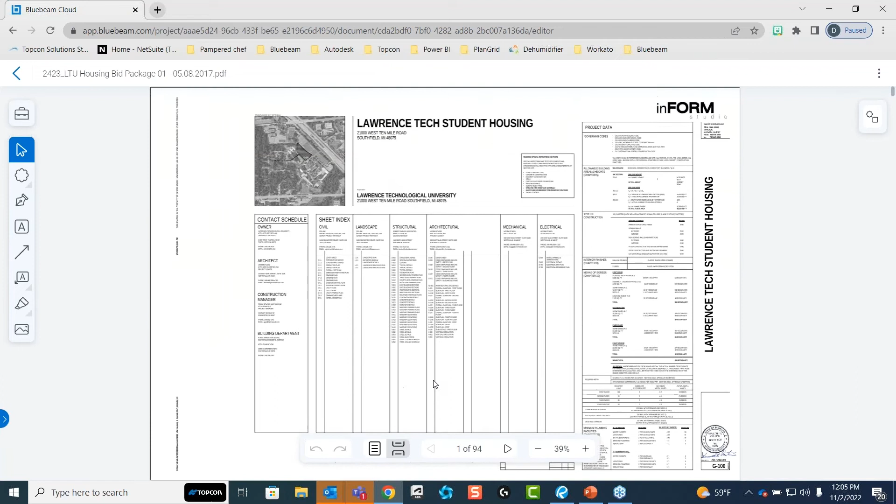One of the big things I wanted to talk about today: we talked about documents and drawings and different ways we can start getting things up here. But a big thing I wanted to make sure I mentioned, documents here in Bluebeam Cloud is for storing any of your documents, and that's going to be different from what we're seeing in drawings. So if I go into my LTU documents here and click on one of my PDFs, you'll notice it actually gives me the capability to do that one full page or scrolling pages view of these PDFs, so I get to look through all the different pages within this PDF document.

If we go to drawings, you'll notice that essentially what drawings does is it pulls these PDF sets apart into individual drawings and places them here. Now it is going to run OCR over those drawings, trying to find the actual information in terms of what is in the drawing itself, like our sheet name, sheet number, things like that. So one thing to think about is whether the document is capable of giving us that information, like the C107 here striping plan, or the A1.1.1.

This one is a little big, but it's saying sheet title and number, first floor plan. Is that document going to be able to give us that?

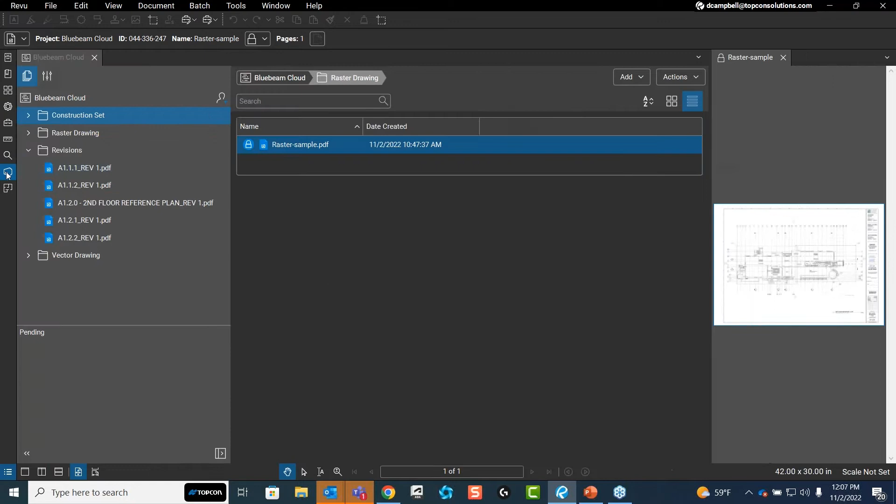One thing I want to mention before we even push it up to drawings is that I like to go into Revu and actually run the OCR on the document. So if I go into my raster drawing here, I have a raster sample, and I'm going to show you guys how this works today. I plan on doing a little bit of everything to talk about getting these documents ready and getting them up to the cloud.

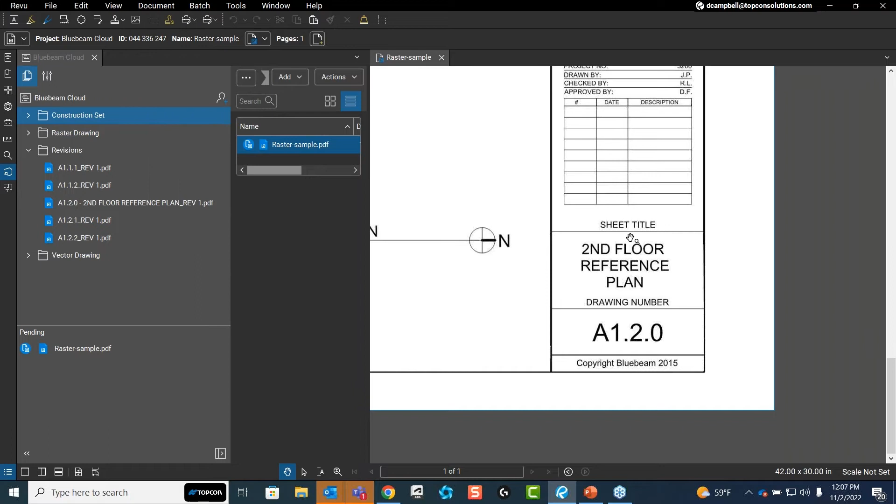So on something like this, where you're going to see it's a scanned document, that's exactly what this is, I typically try to go to OCR. Now since it's in my project, I'm going to need to check that out, and then I can go ahead and run OCR on it to try to pull some of the graphics or information from the content of this PDF.

We're going to dive deeper into that workflow in a second, but I want to back up because the other piece I need to talk about when looking at drawings is the revisions. In this case with my door schedule, you'll notice that it did say R1 on it.

Some of the other ones I wanted to mention here, I'm going to go ahead and show this to you guys so you can see exactly how this works. But one big thing that I've noticed within Cloud is...

Cloud does not give you the capability to compare your drawings from one revision to the next, and it also doesn't really stack them. It pretty much replaces the drawing with the revised sheet, which is a good thing for going out to the field—we don't want them to accidentally open an older drawing, so that is fine.

But at the same time, for managing that documentation, for managing that set, it's not going to tell us the version in that sense. It can tell us in the sheet name if you have numbered it that way, or it might have the R1 there for us, but it's not really going to give us the capability to roll back or see the changes between the two different versions.

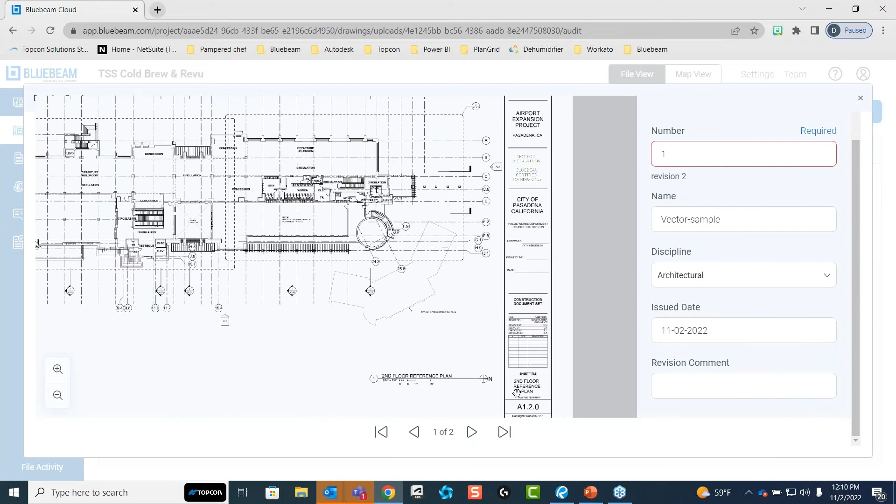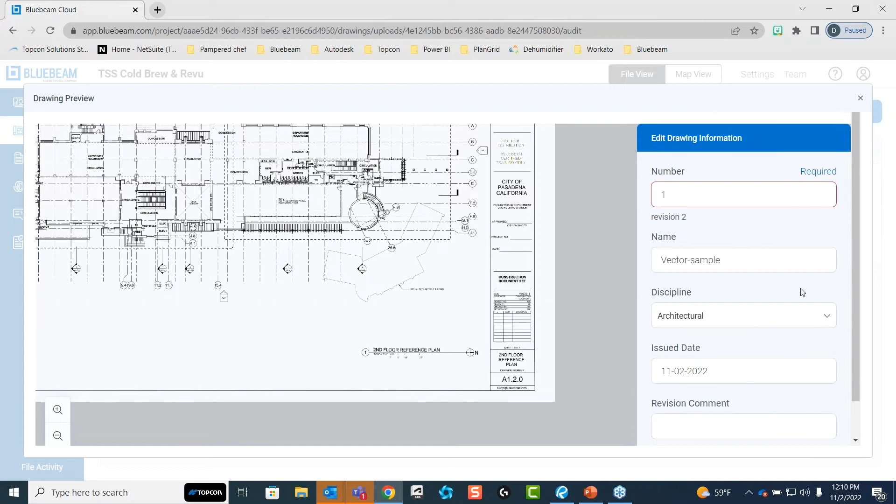So you'll notice on the second floor reference plan here, if it's rasterized, essentially it's going to pixelate. This is my vector sample, but you can go ahead and see that we can start getting some information in terms of what is your sheet number. You'll notice the revision here, the sheet name, the discipline. This is the basic information that we can start utilizing here in the cloud, or adding to that document.

So I'm going to go ahead and hit cancel here really quick, and I'm going to go back to published.

So to add drawings here into the cloud, we need to go ahead and hit add drawings. As I talked about in the previous webinar, we have the capability to import drawings from integrations or from Studio. In this case, since I made that cloud project, I can grab right into that project and find my revisions.

In this case, I'm going to grab these four just because I have not uploaded the new version yet, which I will go look for. Let me hit cancel here really quick because I realized I do not have that one in there yet. So I'm going to grab this one from my browse files.

And I'm going to grab my second floor reference plan. You're going to see it run through and process this on its own. This is a very simple one to do, kind of why I chose it, because it really only has one sheet, so it shouldn't take too long.

Essentially, we wait until it's ready, and then we can hit ready for review. You'll see that it takes you in here. It's going to ask us the sheet name, the sheet number, the title's already here, which in this case, if I wanted to tell what the number was, I could just come down here.

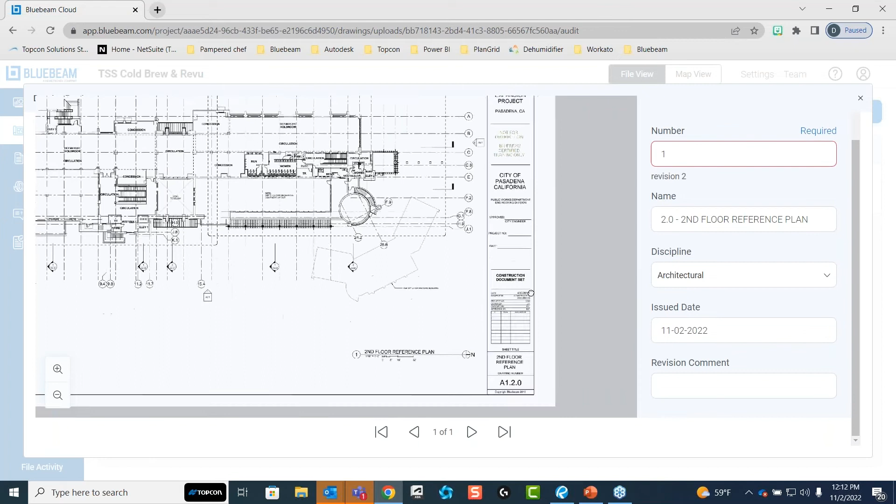Obviously this is going to be A1.2.0. So A1.2.0. Oh gosh, sorry about that.

Now, the other interesting thing is that email kind of threw me off a little bit, but it's actually kind of nice in this case as well. When we upload drawings, it automatically emails you anytime these new drawings are uploaded. And I'm going to go ahead and say this is A1.2.0. Okay.

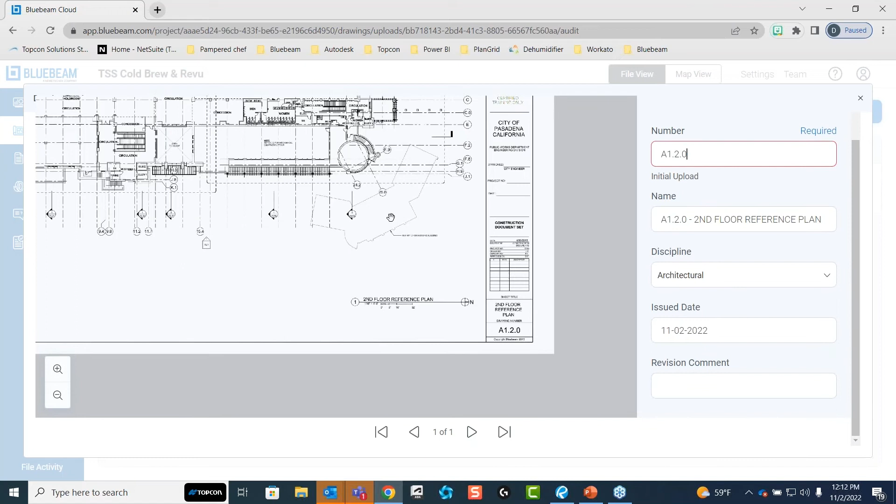Once we've finished entering in that information, we can come back here. We can place a revision comment, anything like that, but we go ahead and publish that sheet. Now we will see that sheet here within our drawings.

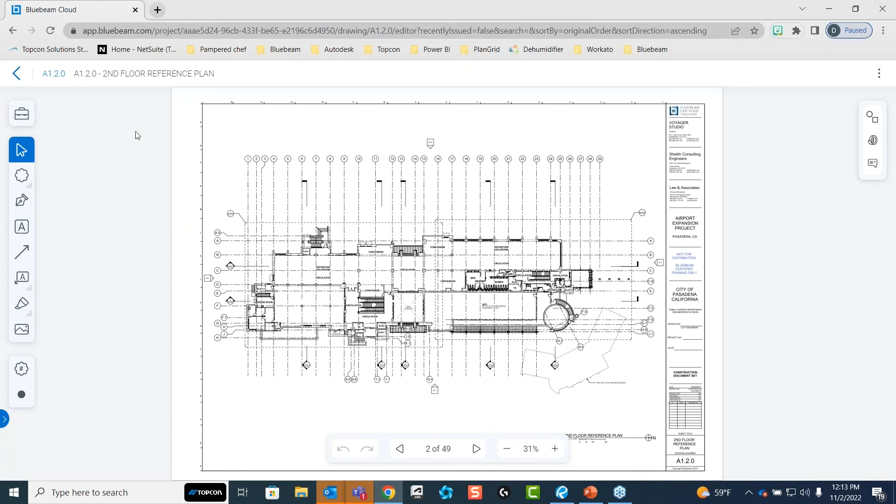I'll give it a second here. There we go. But now I should be able to go ahead and mark up on this drawing. You'll see that we can zoom in on it. It's still going to have that same rendering capability there that we see within Revu, giving us really good graphics.

Now, let me go back here. I'm going to add some more drawings. This time I'm going to pull them in from my project. I wanted to do this so you guys could see exactly what happens when we set these revisions. So I have my different revisions here. I'm going to check all five of these and confirm my selection.

What you're going to see is it's going to run through just like the others. It's going to tell us that it's ready for review, so we've got to wait until it's done processing. We can go ahead and review it to double check what data it did publish or pulled out of that document, and then fill in the rest.

All right, so they are ready for review. We can go ahead and click right on there. So we're going to see Rev 1, and it's telling us the numbers here from each one of those sheets. Now on this one here as well, it's telling me the second floor reference plan, Rev 1, and it knows.

So you guys can see right here, it's saying this one is the initial upload. I'm curious to see if I might have deleted that other one out, but essentially you'll notice all below it'll say the revision number here. I could have also put it in the revision comments, but you'll see in each one of these, R1, R1, R1. So that's telling us this is the revision, this is the revised drawing.

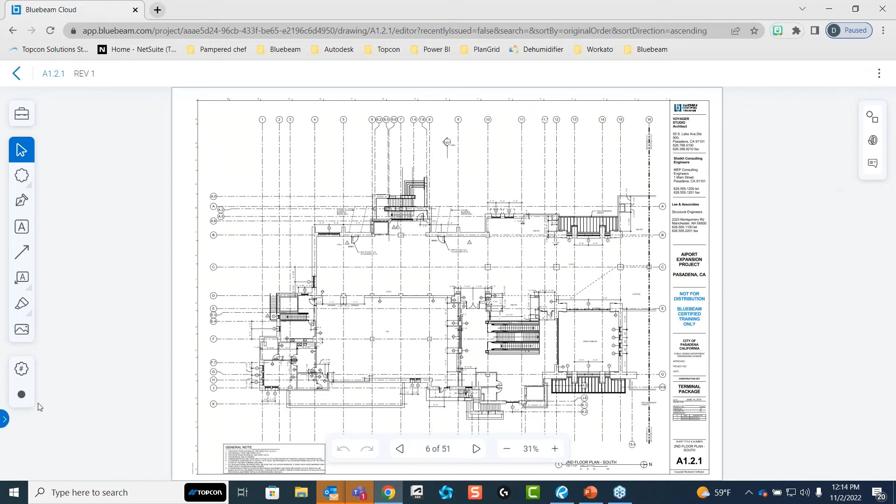So at this point, we are able to go ahead and navigate around that drawing. We can make markups on it, all that kind of stuff. But the other big piece I wanted to make sure we talked about is the actual management of this documentation. A lot of times, guys, I'm still going to say that projects is essentially the way to go if you're trying to use a cloud-based solution.

Otherwise, you could still use Bluebeam Revu locally to go ahead and open up these drawings, right, inserting or slip sheeting those revisions. That workflow is still going to need to be done within Bluebeam Revu.

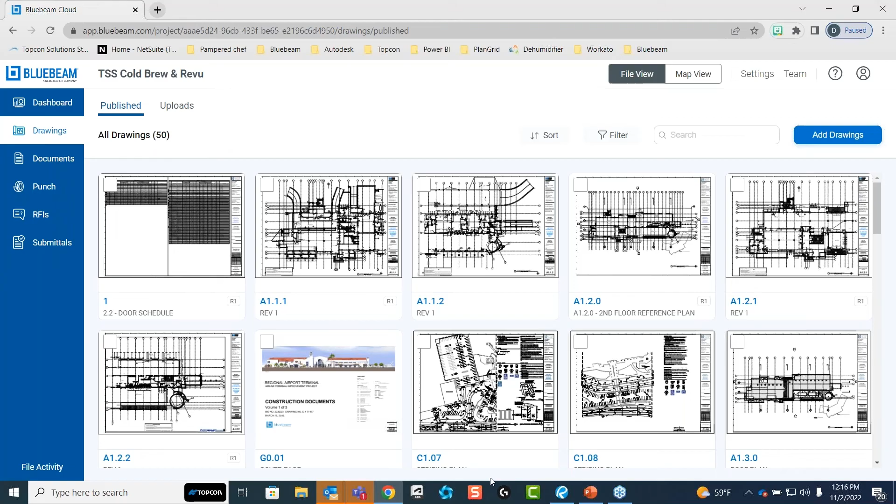All right, so if you do have that extreme version, or in the case of the subscription, you will need the core or the complete. If you're trying to slip sheet, you're going to need complete. But if you're trying to utilize Studio and the cloud, Bluebeam Cloud, you will need that core subscription, okay? But again, we don't have a lot of those document management tools themselves here within the cloud. A lot of that is still going to be done here within Revu.

So in this case, if I had my construction set and I wanted to slip sheet these in and enter them, what I would end up doing is check out this drawing, or my document set, and open up construction set B.

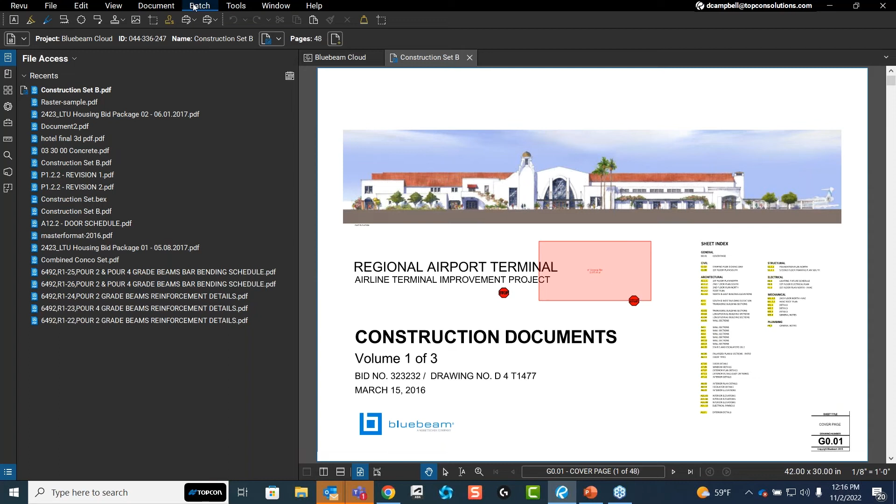Now, this is a little tip I like to talk about, especially when we get into projects. There's a preference setting you can utilize. If I go to Batch and go to Slip Sheet, I'll add my current files, say construction set B, and add my files. You'll see this automatically knows to go to my project, so I can go right into my revisions and grab the 4 revisions from this document.

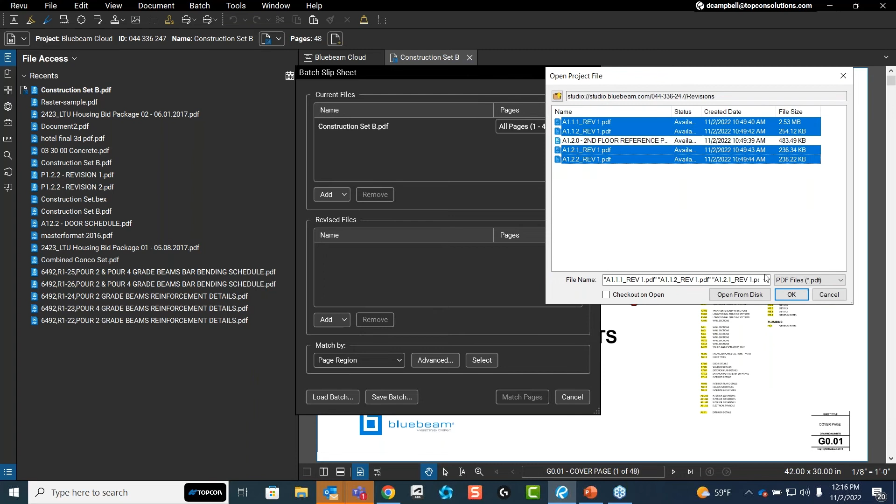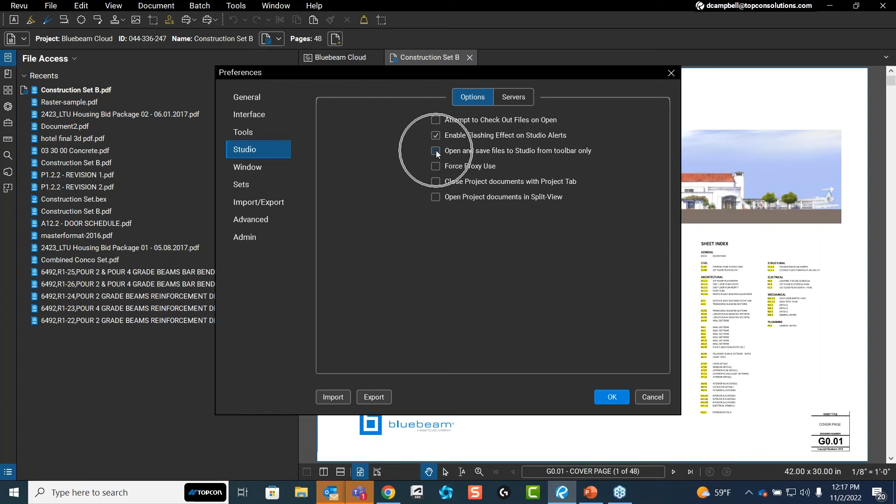Now some of you may be asking, Dave, how did you get that dialog box up? That is under your Revu Preferences, then Studio. There's a setting called Open and Save Files to Studio from Toolbar Only. If you uncheck that, automatically when you go File Open or anything like that, it's now going to give you the capability to navigate to your different projects. So this is a way to still interact with those documents held on the cloud.

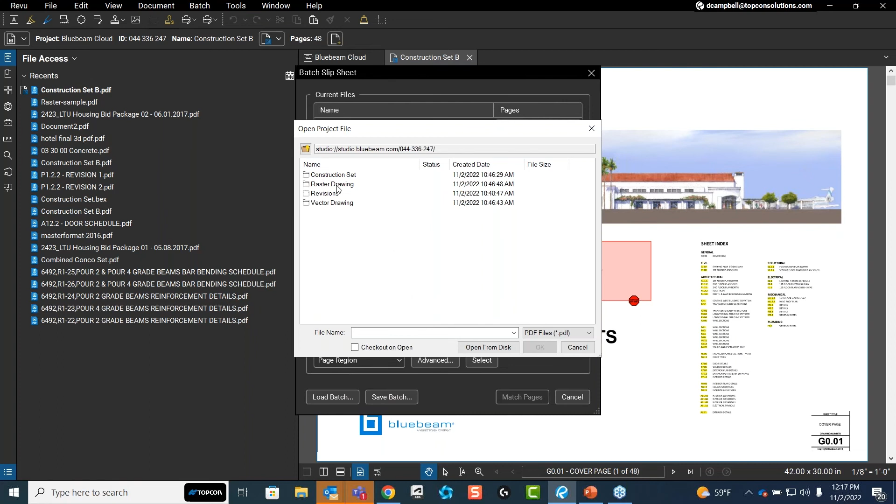So again, I'll go to Batch, go to Slip Sheet, and this is in Revu 21, by the way. I'll go Open Files, Add Files here, go into my revisions, grab those 4 drawings, and check those out on the open here.

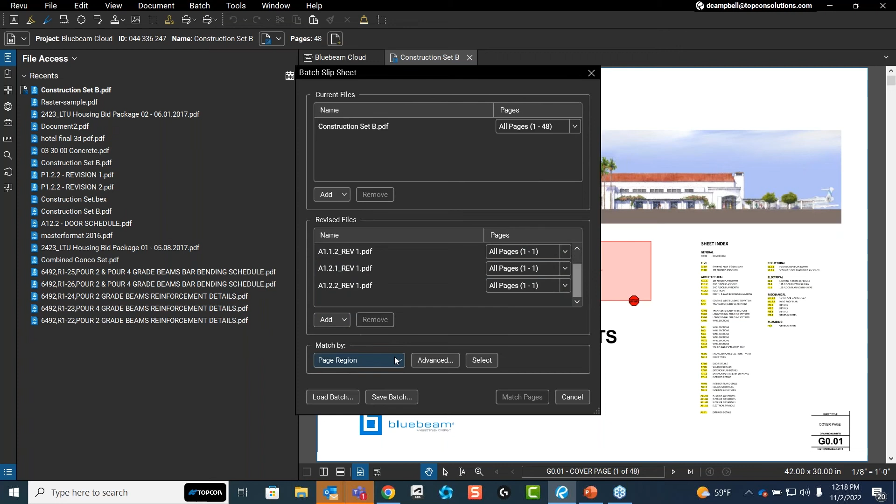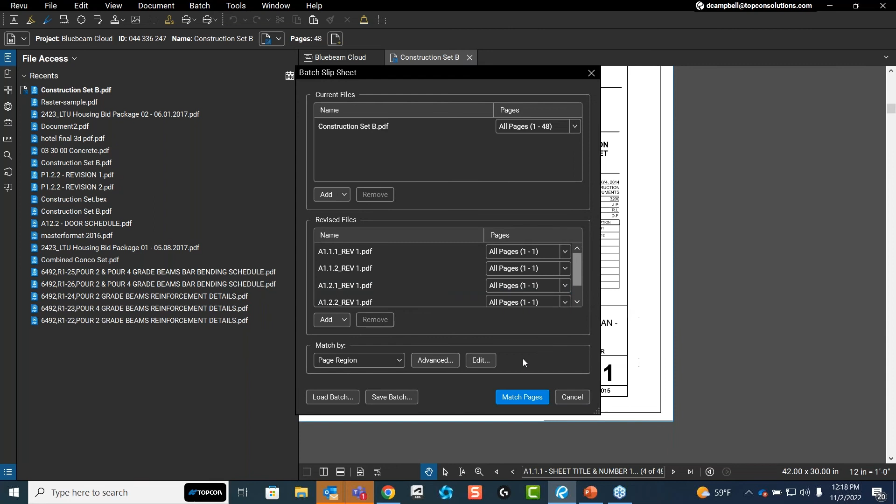Now that I have those drawings, I can specify how I'm going to match them up, which typically I'd like to use that page region. I don't like to utilize the cover page, so I'll go a couple sheets in. I'm choosing to specify that region where this is going to look to match these pages up, and when I go to match pages, it's going to look through the entire construction set B, all 48 pages, to find where these will match.

Again, this is the slip sheeting tool. Now what I can do is either insert the revised pages before or replace the current pages with the revised. If I go insert before, this is where I can utilize that stamp superseded to mark that they have been superseded.

Now if I'm going up to the cloud, I don't want to insert those in, because it'll actually take those documents - any other documents you add within that set are also going to go up there. You could utilize the superseded drawings, you'd just have everybody use a filter, but if we're trying to simplify things, this is a great tool for bringing in the revisions and being able to manage the document and see all the different revisions. It's all based on the workflow you're trying to achieve.

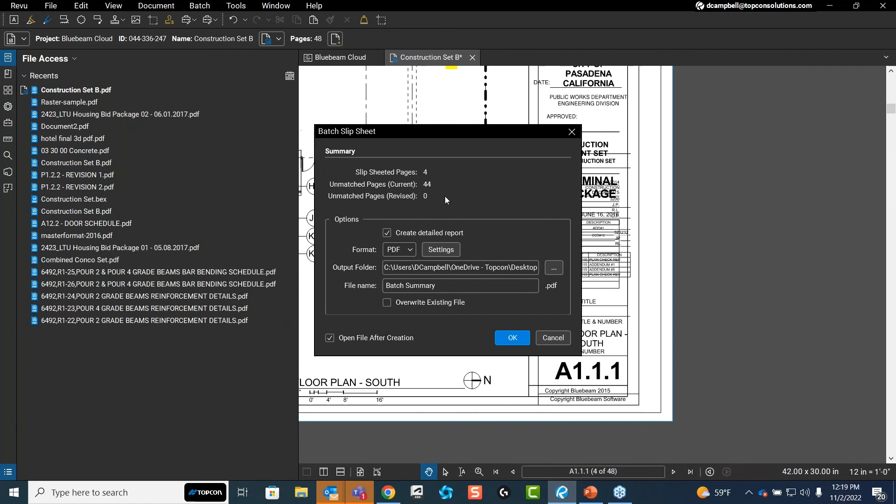For me, I know I'm going to take this up to cloud, so I'll go ahead and replace these, then say OK. Now it's going to go through - it has inserted and slip sheeted those 4 pages in there for me. It gave me a batch summary to tell me where it went and what it did, but I can just go right here into construction set B.

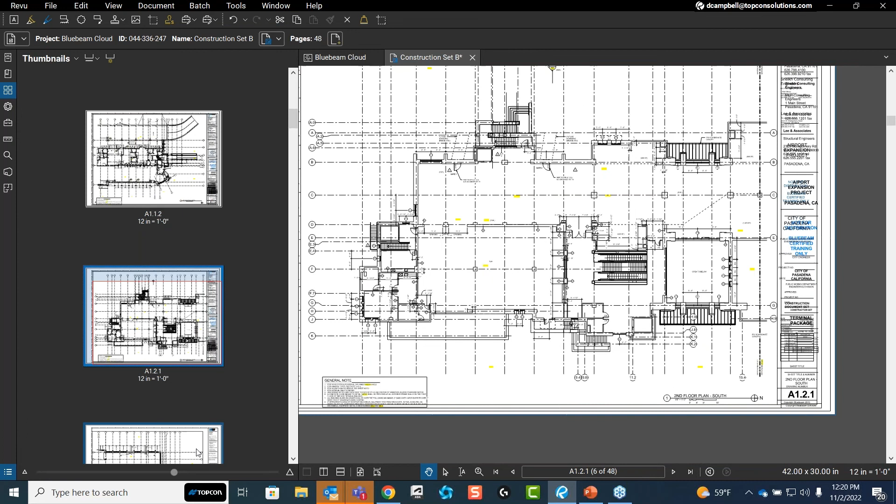If I open up my thumbnails, I should be able to see - yeah, there's my revision. My title block's all weird, so is that one. There we go. So there's my different revisions, those sheets have been brought in. I can go ahead and check this back in, say alright.

Now that that's been done, I can go ahead and add drawings, import them in from Studio, grab my Bluebeam Cloud, my construction set B here.

You'll notice it's going to take just a couple minutes here to bring these up. But essentially, it'll run through that entire document to pretty much do the same thing we saw here with those revisions. It's going to look for any parent sheets that have the same name or the same sheet number, look for the different revisions, and allow us to specify the notes we may need for that specific revision.

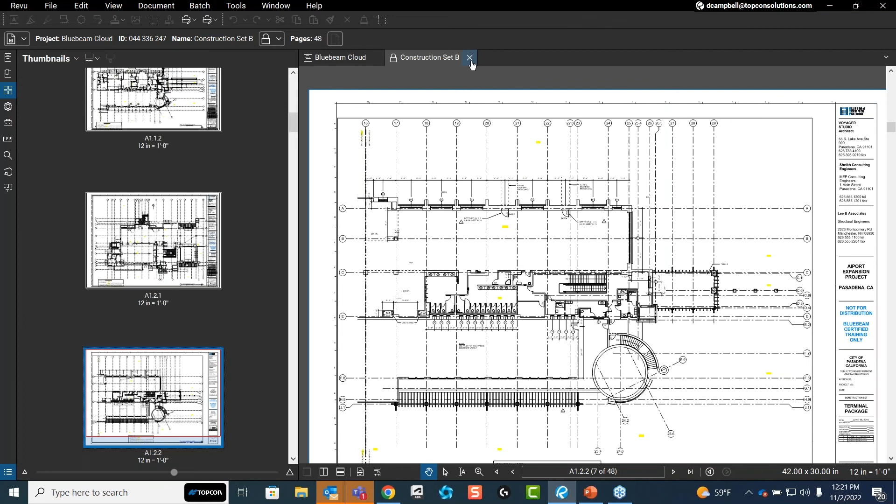While those are processing, the other big piece I wanted to quickly talk about is if you run into scanned drawings. Those are ready to go, but I'll take a second here to talk about these scanned drawings. In this case, my raster sample, I'm going to hit no here to open that up.

What you'll notice is it's a scanned document, right? It's kind of rough. In this case, if we go into document—oh, I need to unlock it, need to check it out first. I'm going to go to document and then run OCR on this. Say okay.

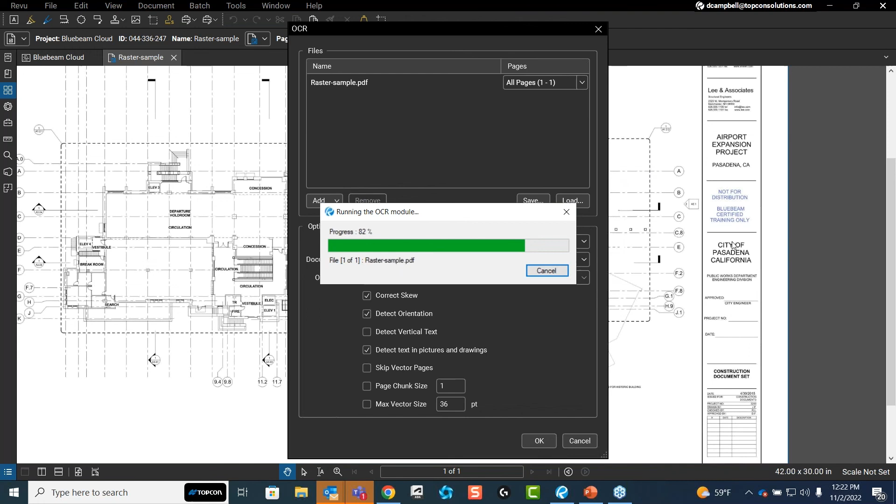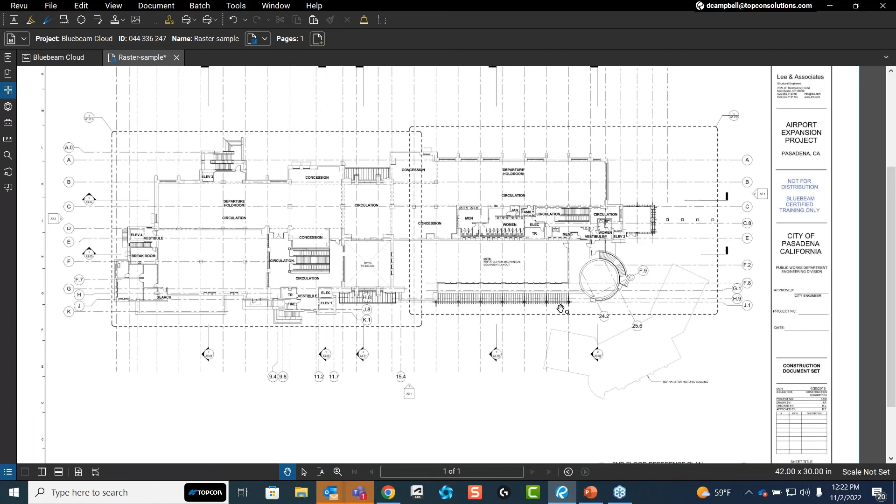The big thing I wanted to do before I save this into my project, before I bring that up into my drawings, I wanted to talk about this really quick, just because you're not going to get it perfect. The OCR is not going to essentially transition an entire scan document perfectly. If it's a bad scan, you're going to have some issues. If it's a really good clean scan, you'll be able to pull some more information from that.

The big thing I wanted to say here is when I go to publish this, notice right now this is my initial upload, and this is that raster sample. This raster sample doesn't know what it is, doesn't know the title or anything like that. So let me go ahead and cancel that out really quick.

If I go to add drawings now, I'm just going to grab my raster drawing here. And we're going to let that finish processing.

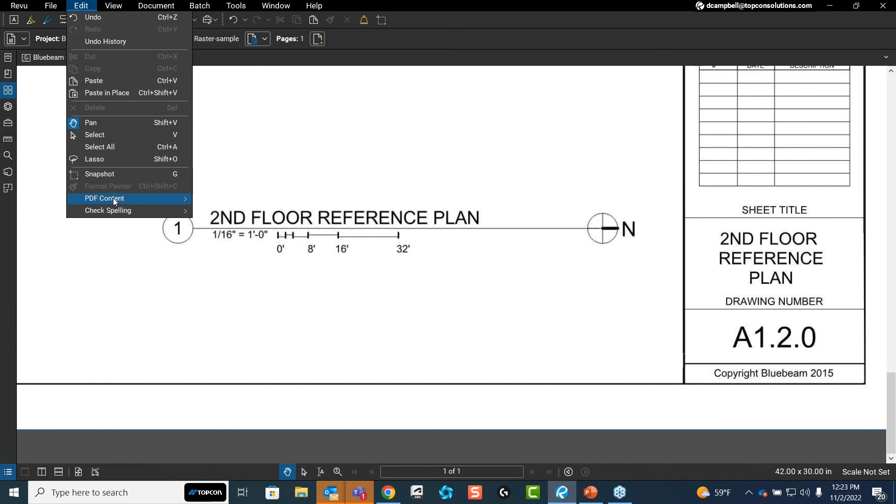Now, again, the reason we run OCR is, in this case, if I wanted to go ahead and snapshot, or if I wanted to edit any text or anything like that within the drawing, it's going to give me the capability to do that. The big reason I'm looking to do it here—you'll see it's still not giving me a really good name and number for this.

So one of the best ways to do this is just to go in, look inside of that sheet if you can, and then go ahead and pull—say this is a 1.2.0.

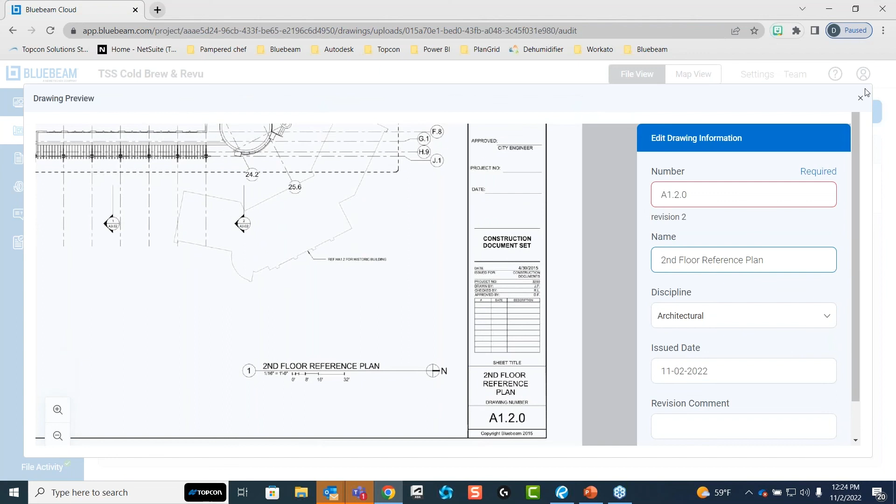David, we had a question that may be related to what you're showing here on the screen. Someone's asking, can you import sets, for example a .bfx file? That is a great question—I am going to test that out. And yeah, thank you, I think that might be a good future Cold Brew & Revu topic.